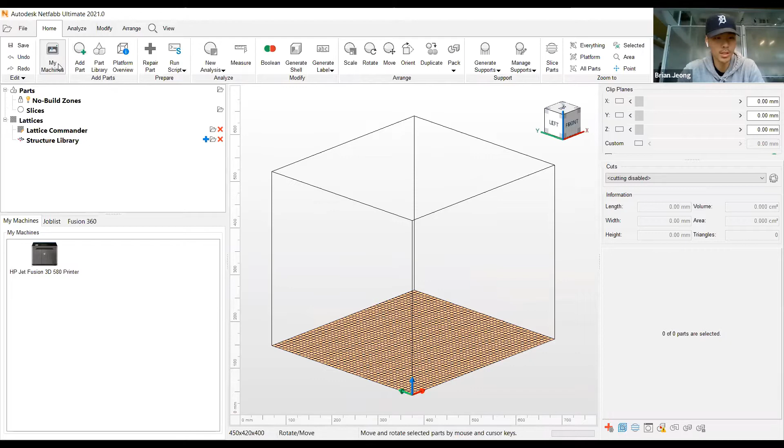Right now I have Autodesk Netfabb Ultimate 2021 open, and I started a new project. First thing I'm going to do is go to My Machines, where I have to add in my 580 printer.

I'm just going to delete this one to show you how easy it is. I'll click Add Machine, scroll down to HP, and it gives you a list of options. The printer I have is the 580 here at the Autodesk Technology Center, so I'm going to choose the 500 printer series. From here, I can edit however I like.

I'm going to name this 580 printer, and go into settings, where I input the IP address specific for the machine. Let's go to the HP, and I'll show you how to connect it to the network and where you can find the IP address.

All right, so here I am at the HP 580 printer, and you can see that we have already connected the printer using an Ethernet port, and that's already connected to the network here at Autodesk.

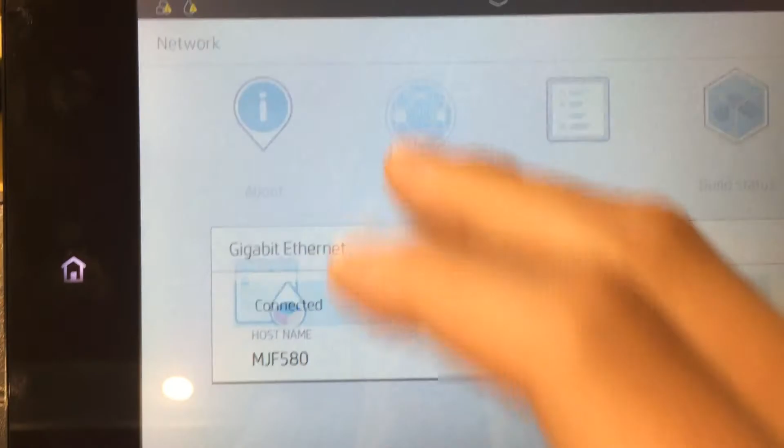From here, I'm going to go under the menu, and if I click connectivity, I'm going to see my IP address right there. I'll take note of that, and then I'll see you back at the Netfabb platform. Once we have the IP address noted, I'm going to input that IP address here.

And click Save. I'm also going to open this printer because I want to print something with it. So now I have an open slate, blank build chamber. From here, I'm just going to add my part.

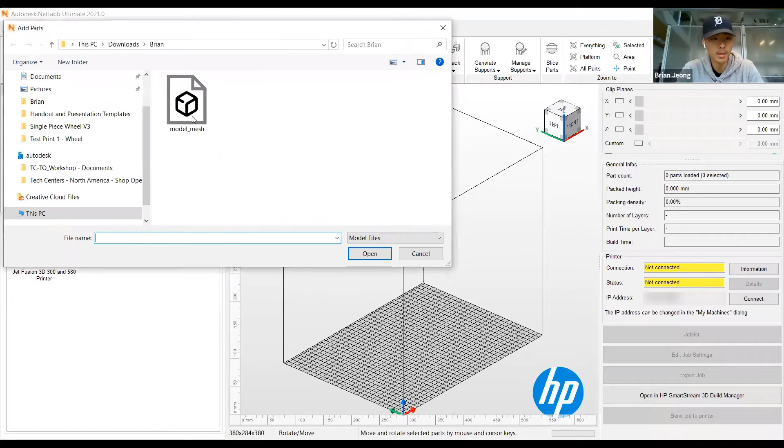In this case, I'll just add a model mesh that I 3D scanned myself. It's a model of myself that I want to print and just put right at my desk.

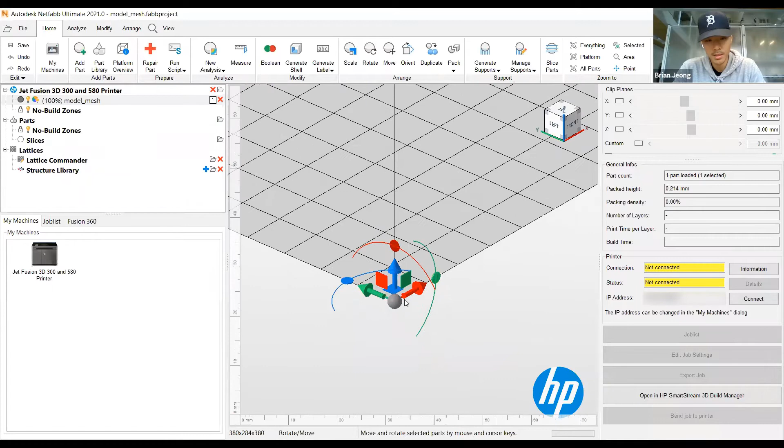Cool, let's add the part, and you might have to scale it up a bit. Yeah, so it's a little small. I don't want it that small, so I'm just going to modify, go to scale, and scale it maybe about 50 times. And looks pretty good.

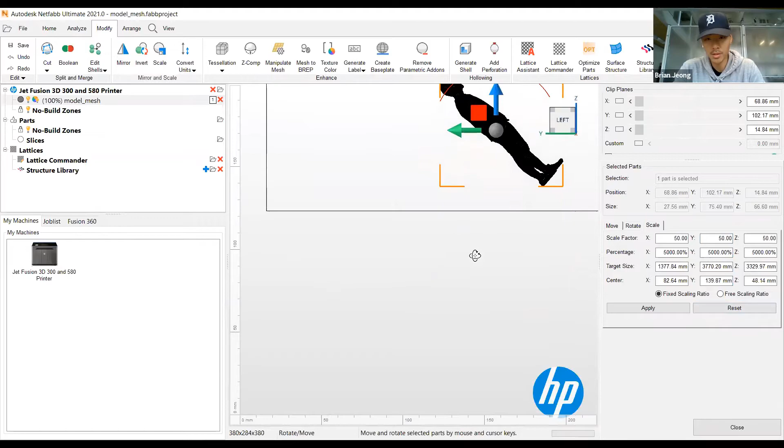I'm going to orient that and set it wherever in my build plate, however I like it. Make sure that it's within the build chamber, and I think I'm pretty happy with that. Once that is set, I'm going to close out of this dialog box.

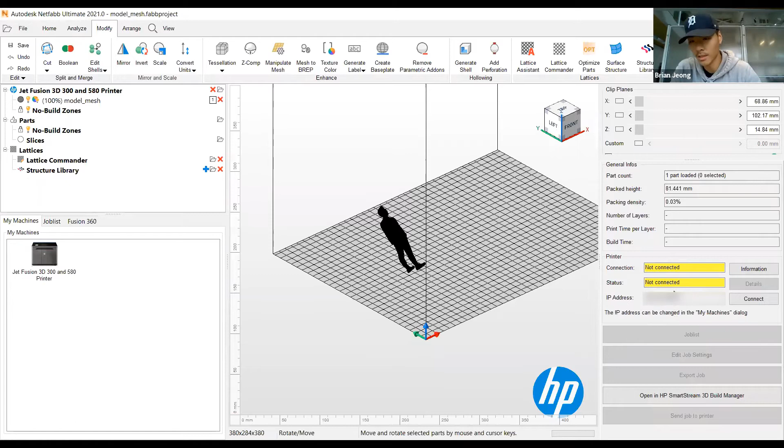On your right panel, you're going to see under General Infos, this is where you connect to the printer. You can see the IP address here because I inputted it in the settings. So I'm going to click Connect. And there we go, connection established with my printer.

There are going to be some machine statuses if you have any warnings, things like expired agents or expired materials are going to show up here.

Now that I'm connected, you can go ahead and edit your job settings, your process parameters, like layer thicknesses, but I'm happy with it. So I'm going to click Send Job to Printer.

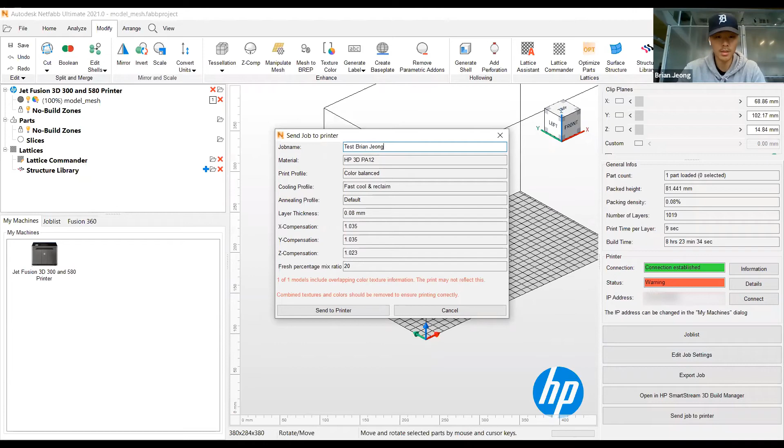From here, it's going to give you a confirmation of some of your print settings, and I'm going to click OK. Now here you can change your job name, so I'm going to name it Test Brian Jeong and send to printer. It's going to do its thing, calculate, export, and there we have it, sent to the printer.

So let's go over to the HP, and I'll show you how to print it.

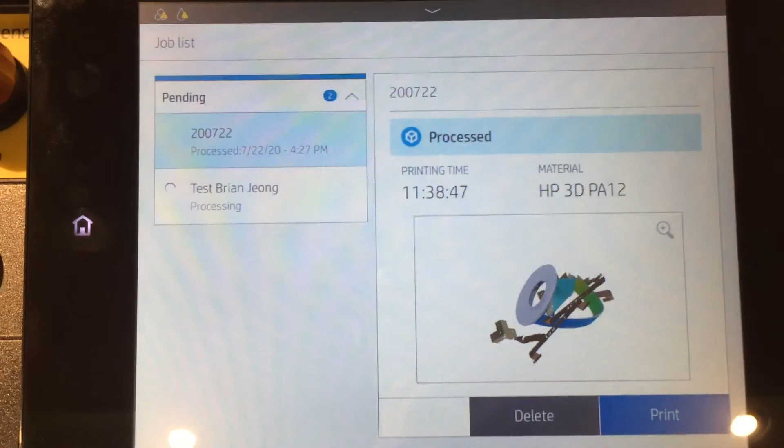So I'm back at the printer after sending the job from Netfabb, and if I go under Jobs, I'm going to see that a new job or a new build is currently processing. And there's myself, and that's the print.

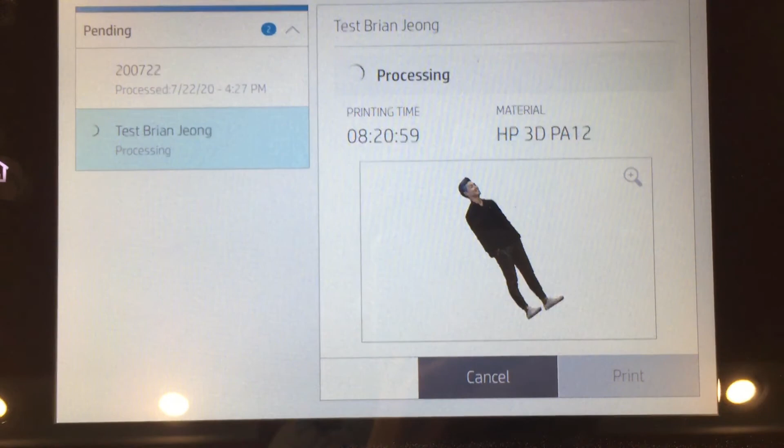It's going to take a few minutes to process depending on how large your print is, so be a little bit patient. But once that is done, all you have to do is click print and you should be ready to go.